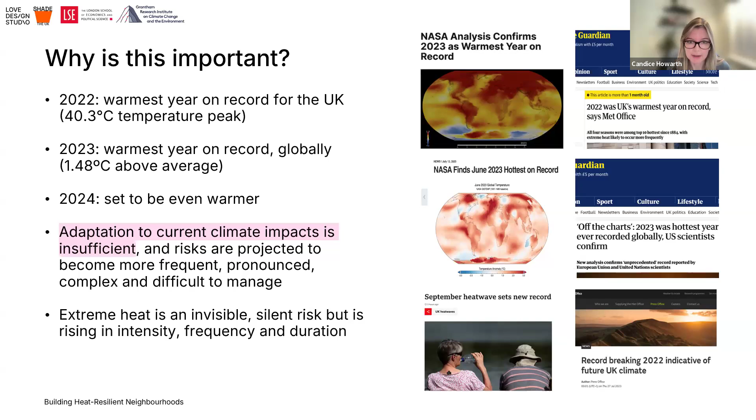We've been looking at this for a number of years now. If I move on to the next slide, we have an animation we'd like to share with you. Hopefully this will work, but if it doesn't, we have a backup.

In summer 2022, temperatures in England reached over 40 degrees Celsius. Almost 3,000 people died from the heat, and a national emergency was declared. Older people, people with health conditions, the young, and people directly exposed to heat, such as homeless people and outdoor workers, are most at risk. Extreme heat can impact the economy and productivity, leading to reduced performance of buildings and infrastructure. Trains can be delayed by lower speed limits to prevent buckling or the expansion of overhead cables. Performance of workers can be impaired in overheated workplaces.

Extreme heat impacts food security by damaging crops, harming livestock, and destroying natural habitats. Extreme heat raises the risk of other impacts - for instance, if extreme heat occurs when it's extremely dry, this can increase the danger of wildfires. The impacts of heat can also be felt at lower temperatures than those experienced during extreme heat waves. Acting now, rather than trying to cope when heat waves happen, will save lives, protect nature, and reduce costs. Designing towns, cities, buildings, and infrastructure to be resilient to hot temperatures is vital. Protecting nature and creating space for more trees and natural spaces will help nature to cope and keep us cool. Government is failing to act. Opportunities are being missed to increase resilience. Under a changing climate, heat waves will become more severe, more frequent, and last longer. Without adaptation, heat-related deaths will increase. Urgent action is needed now.

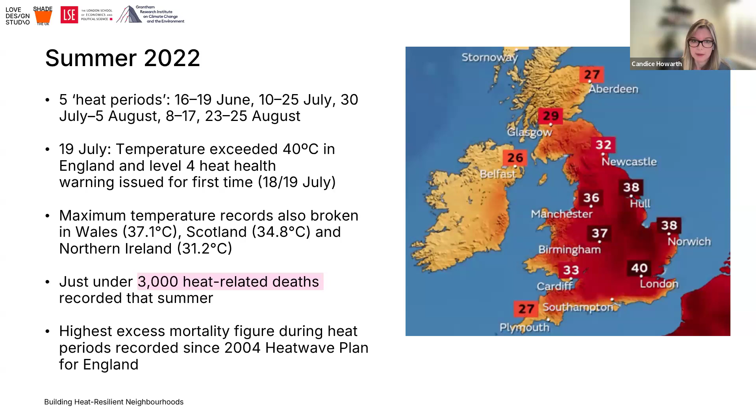So why is this important? We know that the heat back in summer 2022 was made 10 times more likely because of climate change. From what we know around the projections and predictions for climate change in the near future and longer term, this is likely to become more frequent. We're going to see these types of extreme high temperatures, those 40-degree temperatures becoming more frequent, but we'll still see temperatures above 30, above 35, at which people who are most vulnerable tend to be seriously affected.

We know that heat affects both physical and mental health. It's important to combine those two and really consider the way heat affects people's behavior, people's mental health, but also the way it affects medication that people might be taking for mental health reasons. It affects our buildings and infrastructure, it affects people, it affects the economy, and it affects nature. It really affects all aspects of our lives and society.

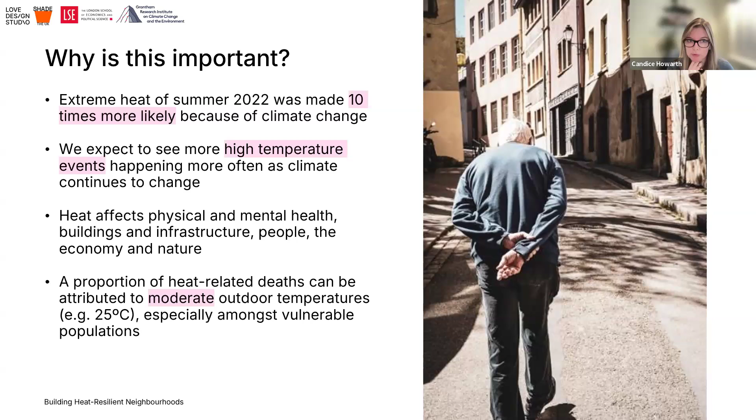What's also important to say is, because we're talking a lot here about extreme heat, extreme heat is very contextual and very subjective. There is evidence to suggest that heat-related deaths can be attributed to moderate outdoor temperatures, as mild as 25 degrees, in certain built environment settings that are not adequately or sufficiently designed to cope with those temperatures. We can start seeing excessive heat scenarios within those settings, and often they tend to house those most vulnerable within society.

So we did some research over the last few years and published this report earlier this year, where we looked at what happened during the 2022 summer heat waves in England, and how that could inform our approaches for the UK as a whole. Quite worryingly, from our analysis of people working on the ground during those heat events, we found that the UK isn't prepared, and the processes in place are not adequate, stretching people across different sectors and organisations to their max.

So that work we're doing calls for a national heat risk strategy to address the scattered approach we have in the UK. Heat risk in the UK needs to fall under climate adaptation, but also within the climate mitigation sphere. We don't want to encourage the use of energy intensive technologies when it isn't necessarily needed, where behavior change and nature-based solutions can help supplement and help people stay cool and comfortable during periods of extreme heat.

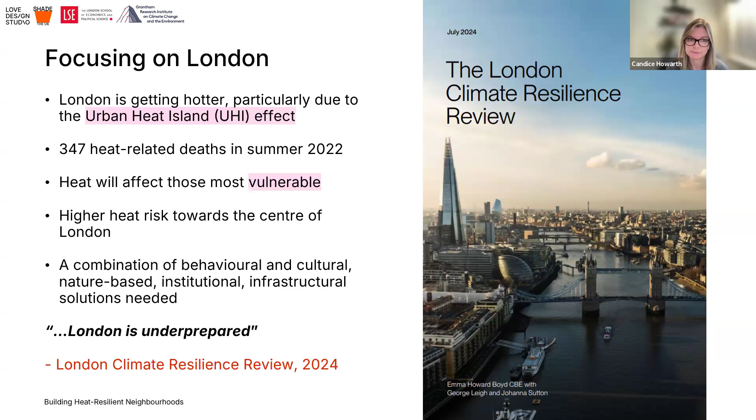So we're focusing even more specifically on Islington for a variety of reasons. Islington as a borough is one of those most at risk of overheating. We see higher densities of different types of properties that are more prone to overheating. This could be because of their age, their condition, their use, or the fabric used to build them. We will come to that in presenting some of the findings in a moment.

We see some of the higher ambient temperatures that are due to the variability of the urban heat island effect, and we also see those local ambient temperatures increasing because of the use of energy intensive technologies where it isn't necessarily necessary. I say that with a caveat though, that in certain settings such as care settings and hospitals, energy intensive technologies is almost a non-negotiable. So there are some complexities around making those choices of what is an appropriate way to manage and prepare for heat.

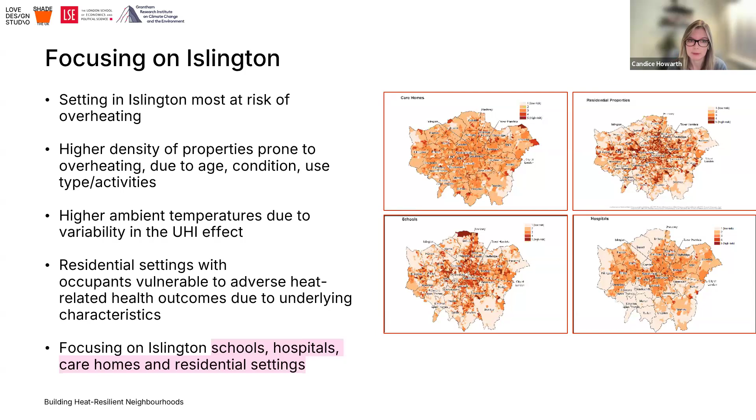This is my final slide, and just to give you another reason as to why we're focusing on Islington - I've mentioned nature-based solutions, and green spaces play a really important role in enabling people and buildings to cool down during periods of heat. But actually Islington only has 10% of publicly accessible green spaces, making it the second lowest among all 32 London boroughs. This is a real problem for the borough, and this is why this research has been looking at the buildings within the borough, those particular settings, to get a sense of their exposure to heat and how that could be affecting those who reside or occupy them.

Finally, just to give you a sense of how the project has been broken down - it's been quite a short project, but we've managed to achieve a lot within it. Huge credit to the Shade the UK team. We conducted an overheating assessment earlier on in the project, and alongside that, we started conducting a review of existing metrics and technologies. We really wanted to get a sense of what are some of the tools that are already out there.

Tools that could be applied within the context of heat to start providing guidance and advice and communicating more clearly what are the risks, what are the impacts of heat in certain settings, in a way that is tangible, so occupants or building managers actually know what to do to increase preparedness and resilience of people residing within those buildings. Alongside that, we had an in-depth stakeholder engagement process, and we also collected a set of narratives, because we can have all the quantitative data that we need.

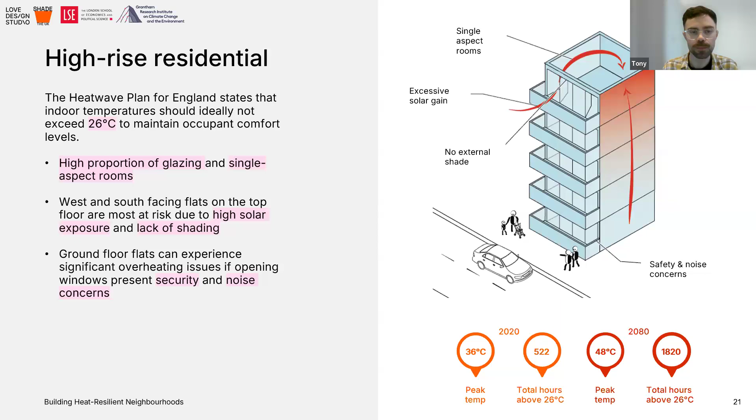Similarly, for low-rise residential, there are again similar risks around solar gains and high temperatures affecting thermal comfort of occupants. One slight benefit that low-rise residential properties tend to have over high-rise is that they're more likely to have dual aspect to aid natural ventilation, and that's reflected in some of the slightly lower peak temperatures we found in our analysis here.

One point to note here is that west-facing bedrooms can be a particular high-risk area, as the heat builds up in the evening and can make it very difficult to have comfortable sleep, which obviously has knock-on impacts to overall health.

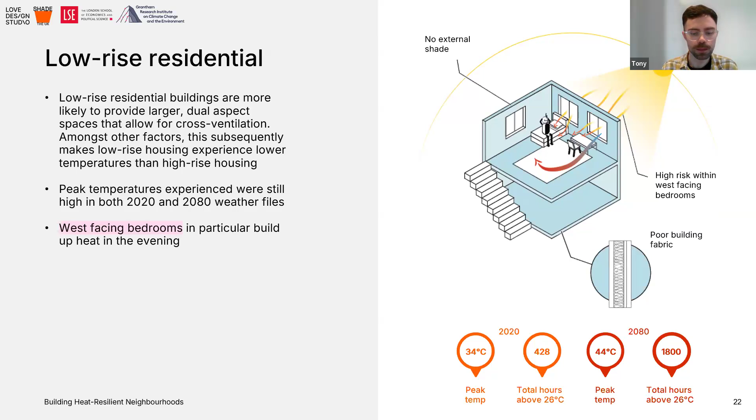Another key building type is hospital, and for quite obvious reasons here, we've got a lot of people with health conditions and vulnerable populations using a hospital. In a change to the standard method applied to other building types, and following on to what Candice mentioned about certain buildings having a non-negotiable need for cooling systems, we also tested how the cooling load and annual energy consumption for those cooling systems would be impacted by a warmer climate and higher indoor temperatures.

We can see potentially quite a lot of overcrowding within the hospital areas and patient rooms, and the potential temperatures are quite scary without the cooling system working, into the 40s for the 2020s weather file and up to potentially 50 degrees C for the warm weather. We see also a marked increase, up to around 50%, in the cooling capacity, meaning systems won't be adequate to maintain comfortable temperatures, requiring a lot of investment to upgrade those systems in due course.

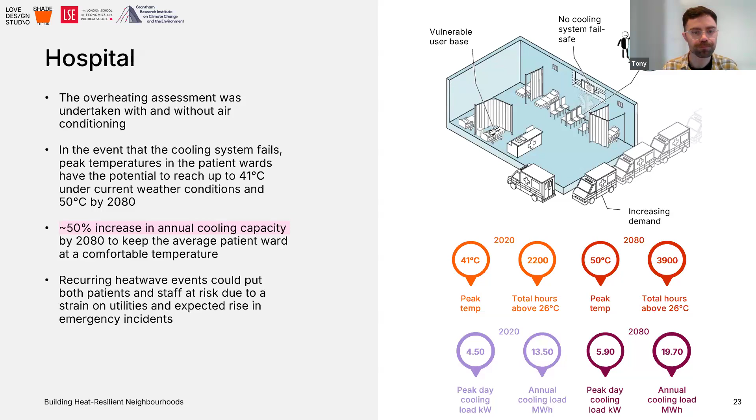Another important type when considering building type and vulnerable people is a care home. We see here key risk factors: people who are unable to voice their concerns or take evasive action when indoor temperatures are excessively high. We found that those lounge areas, where patients and residents spend a lot of their time, are the areas with higher temperatures, potentially due to old ventilation systems not able to adequately remove heat buildup during warmer conditions.

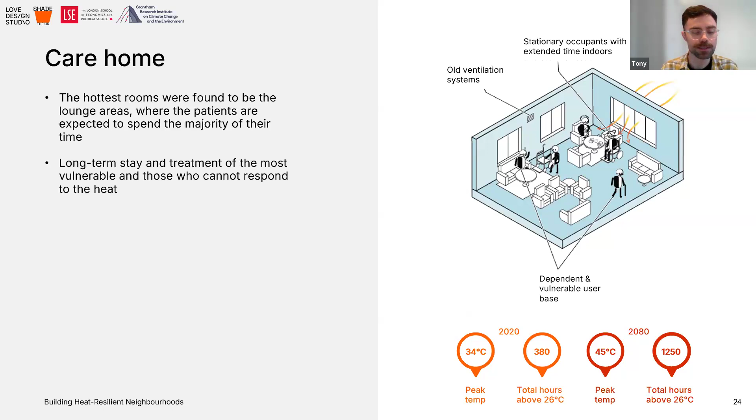We see those temperatures creeping into the mid-30s as a peak temperature for the 2020s weather file, and into the 40s for the 2080s weather file, with quite a marked increase in the hours above that 26 degrees C threshold as well. Next slide, please.

We also wanted to consider prison buildings. You can see from the image on the right that there are certain features of those buildings not well set up or geared towards removal of heat: limited ventilation options, overcrowding, and extended time indoors with quite a compact layout of rooms within the building.

We can see again that the peak temperatures resulting from our analysis, or the indicative temperatures, are straying into the mid-30s, which is already very uncomfortable for the 2020s, and then up to mid-40s as we look at those warmer conditions.

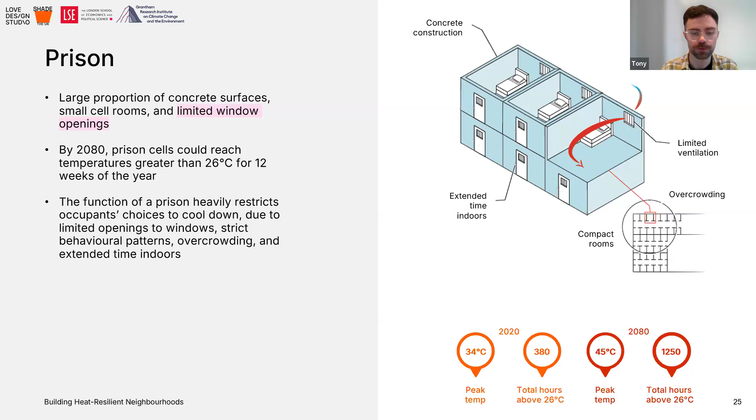And the final building type we're presenting results for, concluding our assessment, was primary schools. Again, certain features of the building can lead to quite high gains: high solar gains due to high proportions of glazing, and high internal gains due to high occupancy densities, lighting and equipment within those rooms.

All the while noting that children can be particularly vulnerable to the effects of high temperatures, which clearly has a knock-on impact on their capacity for learning. The thing that stands out is the hours of exceedance of that 26 degrees C threshold, potentially going up by 4-fold based on the analysis we've been able to carry out.

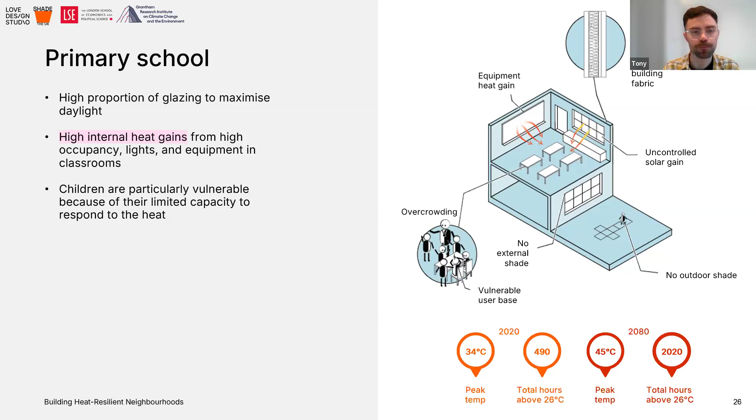Thank you, Tony. That was great.

So for the next part, I'll be sharing key findings from the interviews we did with Islington residents. As Candice covered earlier, an essential part of the project was collecting anecdotal evidence via interviews with Islington residents and people who work in Islington, who shared their experience with overheating within the buildings they live and work in. These stories provided non-technical insights into how buildings are performing under high temperature scenarios, and how the vulnerability of individuals differs within these buildings.

It's also important to note that heat mortality figures, when it comes to heat waves, are expected to be a lot higher than what is actually reported, because heat doesn't always directly harm or kill people in a heat wave. For example, Pamela explained how drugs became practically ineffective during a heat wave once they left the drug room that had air conditioning, and any consequences of this wouldn't necessarily be reported as a heat-related injury or a heat-related death.

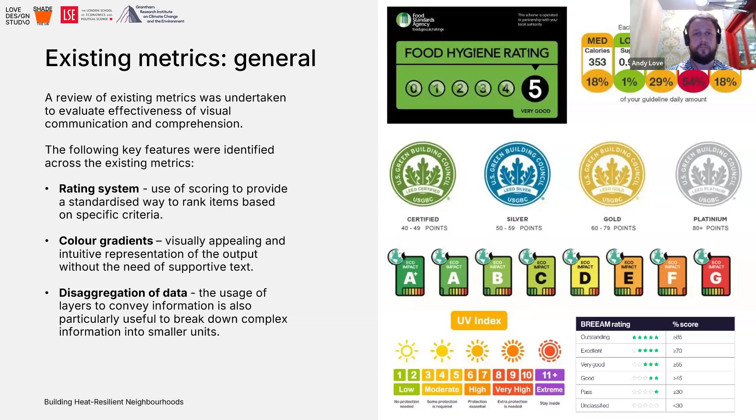So actually what inspired this type of work, off the back of the ongoing work that Shade UK have been doing with LSE in the background, is the Energy Performance Certificate. For those who are unaware, the EPC is a mandatory certificate required when you sell or lease a building, and it demonstrates an energy rating performance, often linked with the actual running costs of the building as well. So it's not just as simple as carbon emissions associated with a building, it's a little bit more complex than that. However, we use this as the kind of baseline approach - can we do something similar to what the EPC does, in a way that means that when a building is sold or leased, it can or has to demonstrate whether that particular building is resilient to overheating risk or performs well.

The reason being that we think that if a landlord or a homeowner is given the stick rather than the carrot, and pushed to show what the performance of a building is when it comes to overheating risk, they may look to retrofit their building or enhance its performance before they sell or lease that particular building. And that could be an office building, could be a residential home, it could be any type of building, public or non-public.

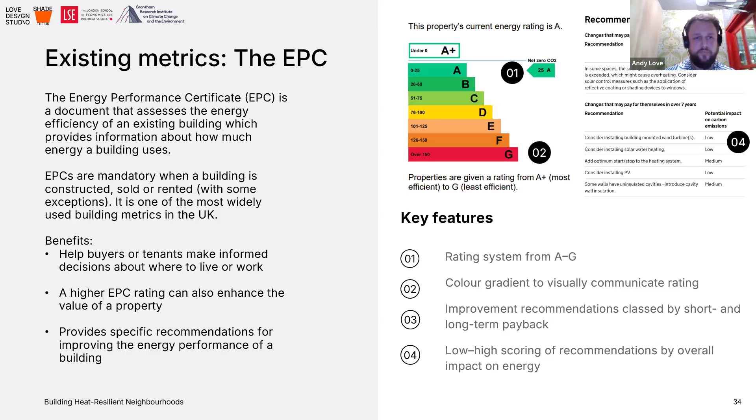As part of the research that we did, more traditional research, we looked into what is happening across the globe, internationally, in Europe and the UK. For those in this audience who are sustainability consultants or do overheating assessments, some of this will be familiar, whereas other parts will be less familiar.

Internationally, you have certain standards and methodologies for understanding overheating risk, such as the Part O building regulations, CIBSE TM52 and TM59, as well as other ISOs and ASHRAE standards. Whereas locally, we have certain UK-bound technologies, such as SAP 2012, DesignBuilder, and IESVE.

Here we were looking more at the technologies associated with the methodologies, which can help, usually in a qualitative and quantitative way, determine whether a building is performing to a certain standard when it comes to overheating risk. What we found was that they are all quite complex, apart from maybe certain tools such as the SAP 2012, which gives you a high, medium, or low risk output for a building, and the Good Homes Alliance overheating tool, which we liked because the input mechanism was more akin to a survey rather than a dynamic tool, which may be quite complicated and expensive to introduce across the UK as mandatory.

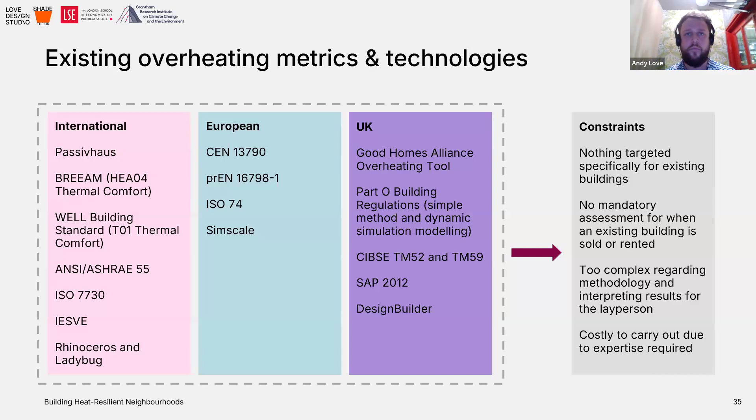Okay, so this is the fun bit. We actually put together some ideas. We've got 4 here that we've come up with, and we haven't gone into a huge amount of detail as to exactly how they could look, because that's probably the next step of this exercise, where we try to do more research on it. But we came up with 4 areas we could look at, or approaches, for producing a certificate or metric or index for buildings to indicate how well they perform from a climate perspective.

This was the certificate approach. I guess this is business as usual. Next to the EPC, or on the EPC, maybe we could have the climate performance sit next to it. The beauty of this is that it combines what is already being done with regards to the analysis of a building. You're already developing a model, or a thermal model, or an energy model anyway. So as an output from the energy performance certificate, it's not too challenging for the software tools to create a certificate that balances both energy performance and climate performance on the certificate.

The risk with this is that often you have people who deliver an EPC and nothing much happens with it. So for this to be quite effective, there also probably needs to be some form of policy change, similar to what's happening in the industry at the moment, where landlords are required to meet a B rating by a certain period of time. Maybe that could be the same with the climate performance, where you need to meet a certain standard. Maybe that's a rating of A to G, similar to the EPC. Maybe we need to reach C for all buildings moving forward.

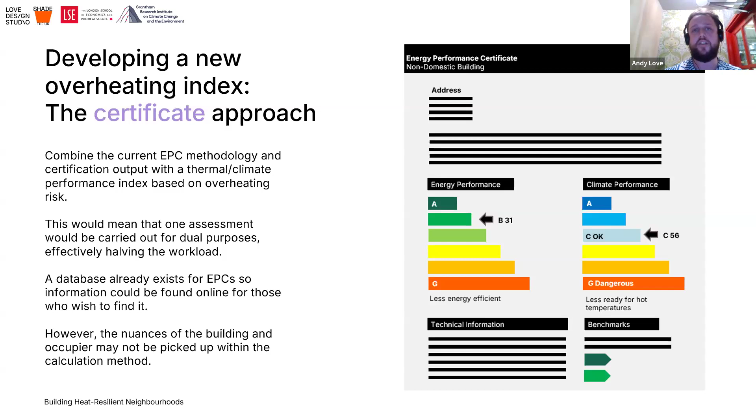To go a little bit too far to one extreme, a version of an index or certificate that sits within the building could look very, very detailed, and we looked at what that might look like. This kind of metric addresses exactly which rooms within a building might be performing poorly. It demonstrates what the score ratings are and shows things in different formats, graphs and tables. It would be very useful probably for someone who has got a scientific brain or is incredibly interested in the building itself, but might be quite challenging for the majority of the population who might struggle to understand exactly what is being presented here. For us, this was a more extreme version, looking at a data approach.

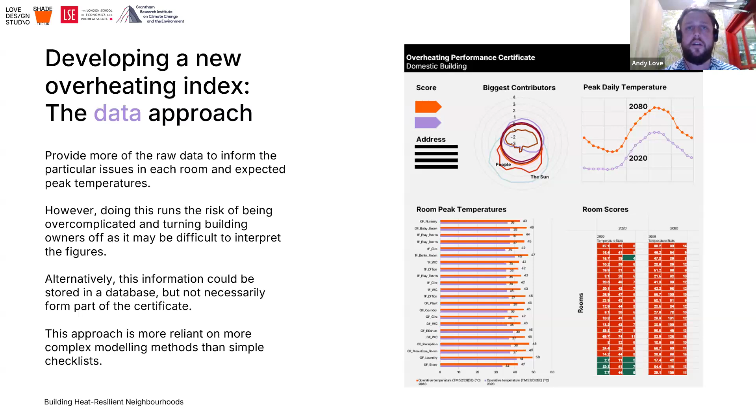Next row. The opposite end of that, thinking about the food hygiene rating certificate we discussed earlier, is a much more simplified version of what we've shown so far. It answers two direct questions: how well is your building shaded from direct sun, and how easily can your building be cooled down? So we call it the sun score and the ventilation performance. This hopefully gives a much simpler approach to the whole issue of showing and demonstrating whether a building is performing well from an overheating perspective. However, we wonder whether this is overly simplified, but something like this could benefit from maybe clicking a link to a website that shows you more information about that building.

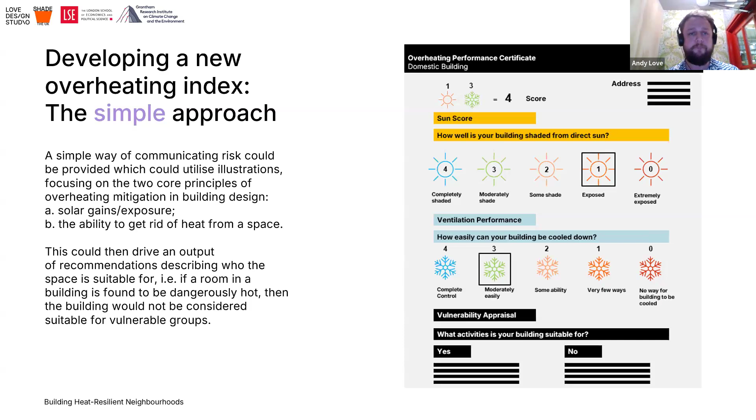Next, something quite similar to what you might see in a tower block where you have a fire exit strategy or plan - having something that sits in your building, a certificate that shows which rooms are performing well and which are underperforming from an overheating perspective. This isn't as far-fetched as we might think, because AI and the skills of estate agents and building surveyors in putting together floor plans are improving. This could be combined with non-skilled workers who aren't overheating experts by trade, marrying up the time for a building survey - whether for selling a property or for structural issues - to also answer further questions and produce an assessment like this.

I think the benefits are that it's very visual - there isn't too much wording or data that could be overwhelming. It might be a little oversimplified and not necessarily give you the information you need to understand what to do, but that could be addressed by having something to find online, or additional information underneath setting out recommendations for what to do.

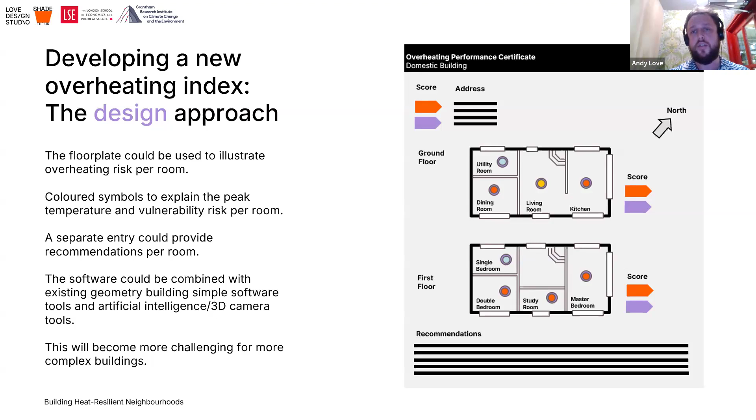So these are the four key approaches we looked at. There are of course many more, and ones in between, that could be explored for future research and development - maybe a combination of one or two would help. I think the general conclusion was that the industry currently doesn't have anything fit for purpose, and there needs to be a lot more research done, including market research, to understand how people view the current EPC rating versus what it could look like if we introduced a new certificate around overheating mitigation.

Thank you, Andy, that was really great. I'm going to pass it over to Anna now, who will talk about next steps for this project.

Great, thank you so much Shreya, and thank you for those really inspiring and informative presentations. We felt it was important today to pause for a moment and, certainly from Grantham's perspective, reaffirm our commitment to ongoing collaboration with Shade the UK and the wider community of stakeholders who have a real passion and concern for addressing the risk of overheating in the UK and beyond.

At Grantham we have a range of new projects focused on addressing heat risk coming on board early next year. We'll be looking forward to sharing details of those in due course, but we very much hope to continue working with Shade the UK and others on developing the next steps with this project, and seeing this concept of a heat metric actually come to life.

We feel really proud of the progress this project has made in understanding what heat risk means and how it could be addressed in buildings. The work that Love Design Studio and the Shade the UK team has done with a modest budget has been really impressive, detailed and impactful. So we look forward to hearing what everyone on this webinar thinks after looking at the report. Please do share your feedback with us and with the Shade the UK team, and your advice and views on how this whole agenda can be addressed and progressed most effectively.